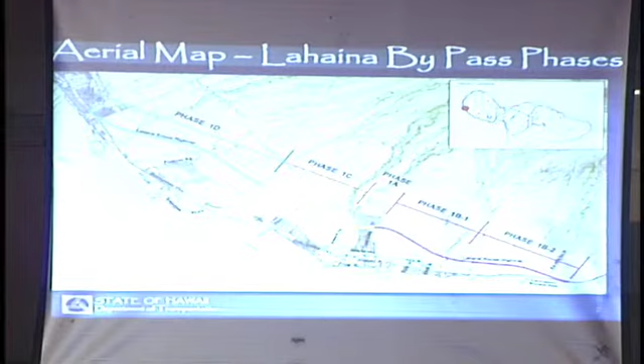As was mentioned earlier, Bob Pure is also the executive director of the Lahaina Bypass Now group. I can honestly say, without their help, this Lahaina Bypass Now project, well, the Lahaina Bypass period, would not have even started. I don't know if some of you came to the meeting last year, we pretty much updated you on what was happening. Basically, this is the Lahaina Bypass project.

I guess you cannot see the pointer very well, but if you've been up to Lahainaluna Road, you'll know that the first phase of the Lahaina Bypass is in progress. That's the section between Lahainaluna Road and Keawe Street, Keawe Street being the street that goes up to the Lahaina Gateway Shopping Center, across and mauka of the large shopping center at the bottom. We also have another phase that's already in progress, which hadn't started, I think, as of last year.

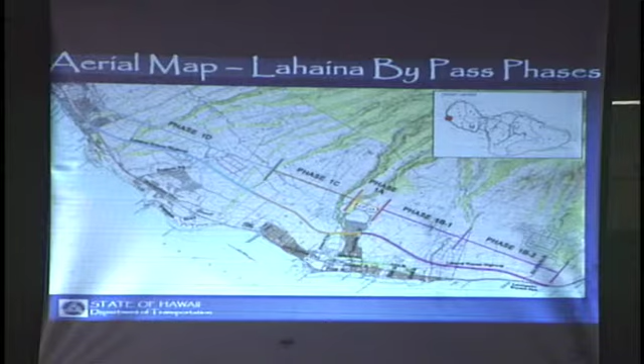We have another phase, which is, I guess it's kind of hard to see this map, but this is Lahainaluna Road over here. The next phase goes from Lahainaluna Road back to Hokiokio Place, which is that road that's between Front Street, Puamana, and Puamana Beach Park that goes mauka. It's just a small dead-end road, but that's going to be a temporary connector.

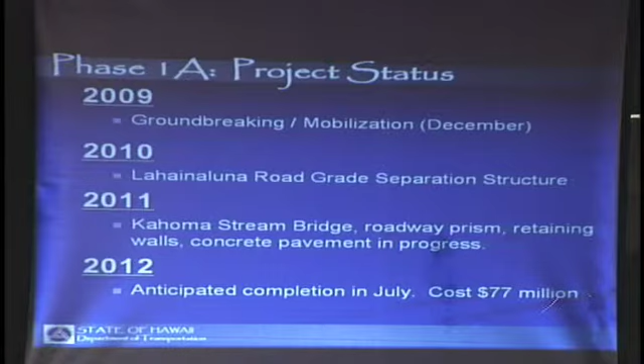Right now, Phase 1A is in progress, which is the one from Lahainaluna Road to Keawe Street. We basically broke ground way back in 2009 and we've been in progress since then. In 2010, we finished the Lahainaluna Road grade separation structure, which if you drive up Lahainaluna Road, you'll see that bridge structure that literally overpasses what used to be Ikena Avenue, now excavated about 30 feet below. Last year, we started the Kahoma Stream Bridge and some of the roadway prism, retaining walls, and concrete pavement, which is still in progress. We expect to complete this project this year in about July. If you look at that, you see that dollar amount, $77 million. That's only one project.

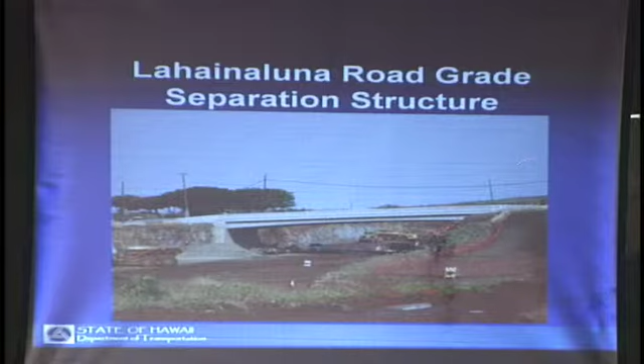Just to give you a little bit of picture, this is Lahainaluna Road going up mauka. Ikena Avenue used to go this way, and it used to be at the same level as Lahainaluna Road, if you remember. It's actually excavated now, and the bypass is going to go underneath. This is Kelawea Mauka Park, and this is the Kelawea Mauka subdivisions, just to give you an extent of the size of the project.

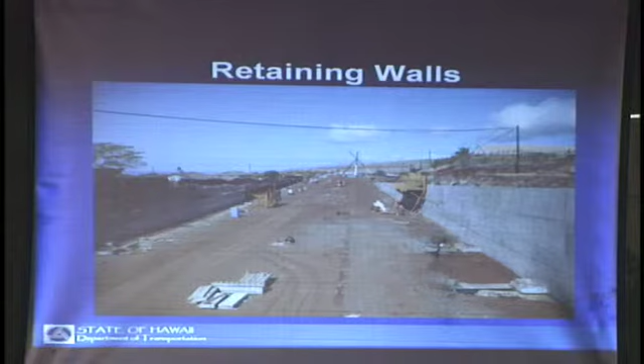Here's another view, this is looking towards Ka'anapali. This used to be Ikena Avenue, and you can see the houses up here, and then Kelawea Mauka Park here, and this is how much it's been excavated below, and these are the retaining walls that are being constructed. Further down towards north, this is looking the other way, towards Olowalu. This is the mountain.

This is the Kelawea Mauka subdivision, and this is the Kahoma Stream. We have this huge Kahoma Stream bridge structure that's under construction.

It looks kind of large right now, but you see all this stuff underneath? This is just called false work, it's gonna come off later on. The actual bridge on top here is partially complete.

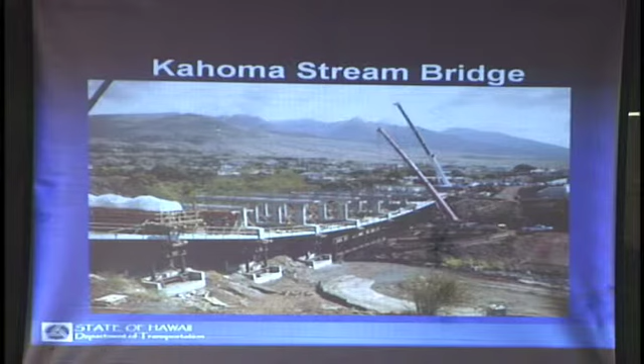They're gonna have some girders that go on top, and then the roadway surface is gonna be put on. This next picture is a little bit of a close-up, and after all that bridge is complete, this is what it's gonna look like.

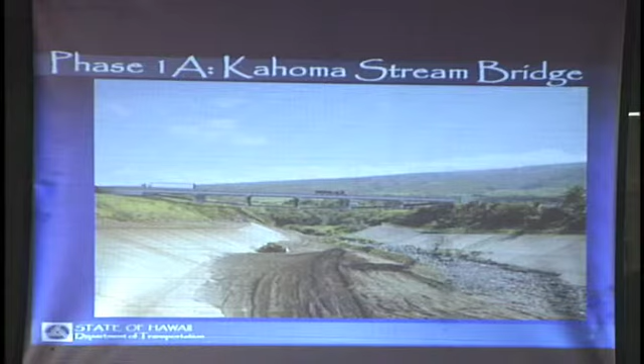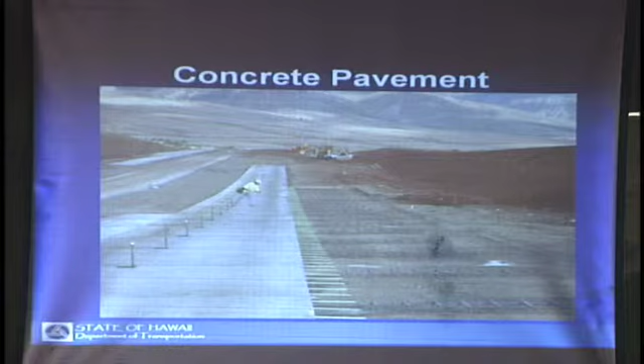And then this is an example, looking back towards Olowalu again. It's gonna be concrete pavement instead of asphalt, because we found that although the upfront cost of concrete is more expensive, over the life cycle of asphalt, we're actually getting a better bang for our buck.

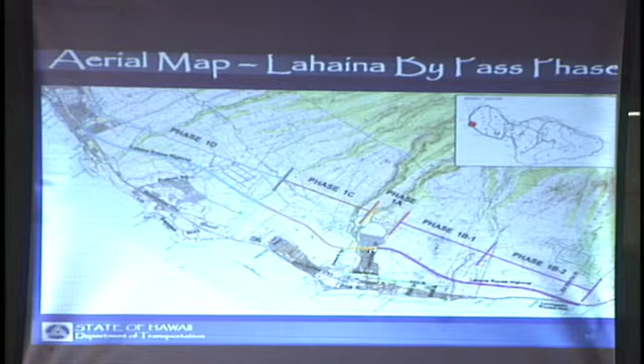I'm going back to this map again to give you a perspective of the next phase, which I described. I'm gonna show you some photos of the next phase, which is Lahainaluna Road to Hokiokio Place. This is the status as of now.

We broke ground in November of 2010. In 2011, last year, we pretty much did mass grading, some culvert crossings, and a small bridge crossing. So it's not much to see right now.

If you actually drive up Lahainaluna Road and look north, you'll see phase 1A. Look south, you'll see what we call phase 1B1. That is also expected to be completed in July.

And again, look at that price tag—24 million. So you can do the math in your head so far, and I've only covered 2 projects now so far.

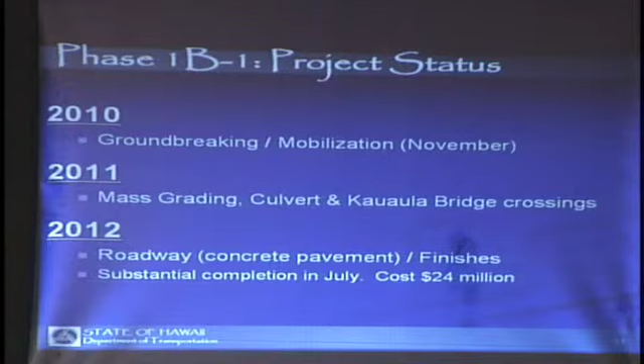Because it's also going to be complete in July, our plan is to really open up 2 phases at once. If you recall, when the state did the Mokulele Highway widenings, we had 5 phases, and the last 3 phases we opened all at one time so we didn't have to disrupt traffic with transitions in between phases. That's our hope, and I feel that's going to be a real big benefit to the public, getting some traffic off the main corridor.

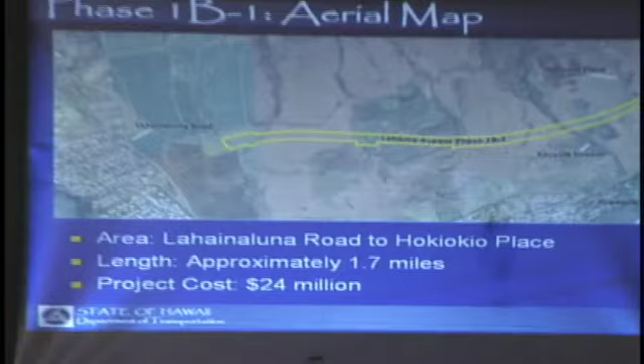Since there's not much to see right now, this is just an aerial map of the limits of the corridor. This is Lahainaluna Road, and this is Hokiokio Place. You can see this is Puamana.

I guess not many of you might have noticed that there's a Kauaula Stream Bridge in front of the Puamana community. It's just past that, it's gonna go just past that.

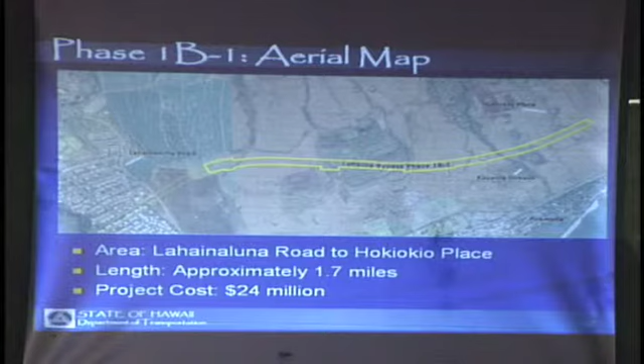The project will also include—oh, my light is out again. Okay, this is the south end of phase 1B1 of the bypass, at Hokiokio Place. We're gonna improve Hokiokio Place to be able to carry a little bit more traffic, and then we're gonna signalize the intersection down at the existing highway.

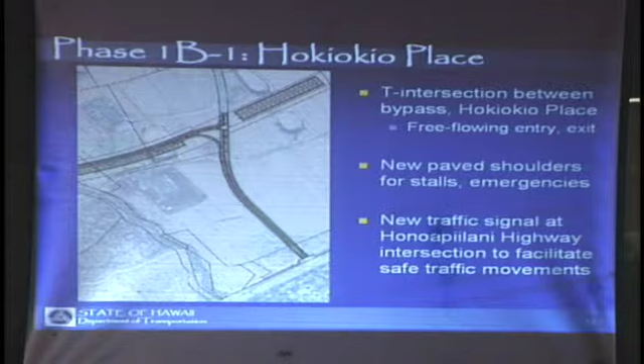And this is just a little bit of the next phase. Here's some photos—you cannot see much. This is standing on the Lahainaluna Road separation structure looking towards Olowalu. Not much to see because it's only a lot of underground work.

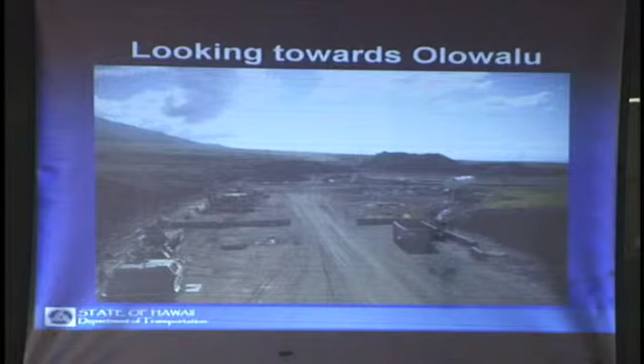The biggest thing going on structure-wise is an arch agricultural crossing, and as we speak, they're setting all these arches on.

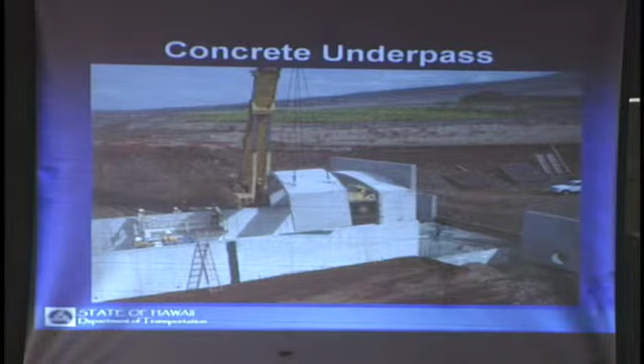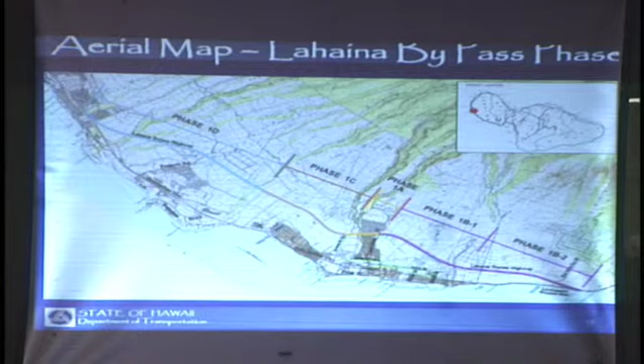Getting back to the map again, to give you a perspective, the next phase we're working on as far as design is what we call phase 1C, which goes from Keawe Street towards Ka'anapali. You can see Ka'anapali down here, so conceptually it's somewhere between the Civic Center and Ka'anapali Parkway. So actually this is the phase right here.